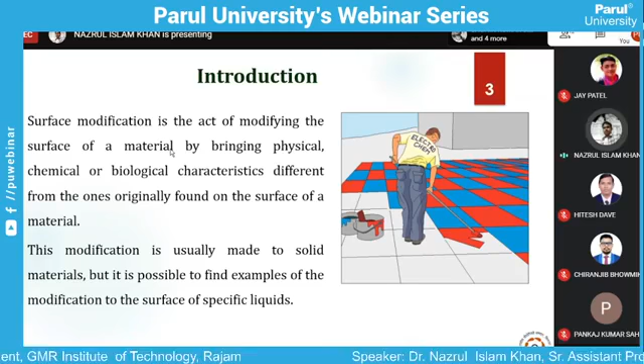This surface modification can be done not only for solid materials but also for liquid materials. If you take the example of the lotus, you can see that nature is also taking advantage of surface modification. In what sense? Let us see. The wings of a butterfly or the leaves, they don't get wet due to rain or water. So why does nature prevent them from getting wetted? Right.

Because if you see the surface image of a butterfly or a lotus flower in high magnification, you will see lots of hills, or finger-like structures on their surface. Due to the presence of those surface textures, the surface energy between the water droplet and the surface becomes very high, so they do not easily get wetted.

Now, what is the advantage of that not getting wetted? In the case of a lotus leaf, whenever a dust particle is on the surface, it reduces photosynthesis. Whenever water comes in contact with the surface, due to the large surface area, the water droplet takes a complete bubble shape, and adhesion and cohesion mechanisms take place.

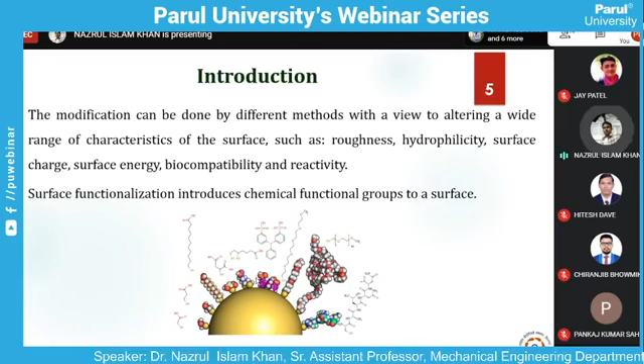Suppose we need charge, then we need to go for some free electrons or double bonds. So those things we can easily add on the surface of the nanoparticle.

In case of polymers also, there are limitations in the application of nanomaterials. In the field of nanotechnology, nanofillers have very high surface energy, and that's why these nanomaterials don't have good interaction with the matrix material—the polymer matrix has bad wettability, you can say.

So to increase the good wettability of the nanofiller with the matrix, or to incorporate certain electrical or thermal properties in the material, we can go for this kind of functionalization.

Surface functionalization is very interesting, please note this point: surface functionalization can tune properties at the nanoscale. If you want to get desired properties from the bulk material, the most important point is that if you can tune their properties at the nanoscale, that will scale up to very high levels when you get the bulk material.

That is why we generally play with the properties of the nanofiller at the nanoscale itself, and finally we harness the good mechanical properties out of the material. It also provides a means of further grafting. As I told you, A does not have the intention to make friendship with C, but if you have a common friend B, then maybe A is having some friendship with C. That's why it helps further grafting or conjugating other materials on the surface.

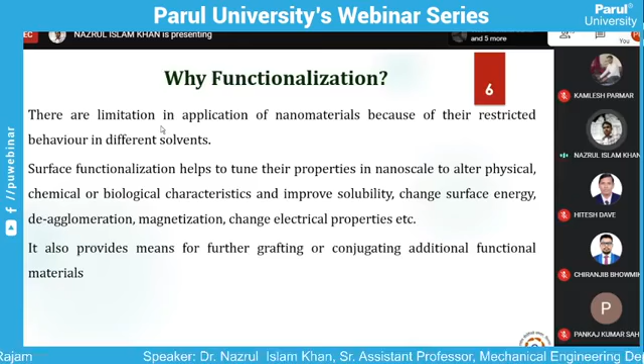So let us first discuss one of the surface functionalization techniques, that is silanization of carbon-based nanofillers. This topic has already been discussed by one of your previous speakers, but it is required to introduce my topic, that is smart self-healing materials. For that, I have taken this topic as well.

As you know, if you want to attach A with C, B is required as an intermediate. So suppose our intention is to attach an epoxy group on the surface of any carbon-based nanofiller. It may be carbon nanoparticle, graphene, graphite nanoparticle, fullerene, or whatever carbon-based nanoparticle. For that, we did oxidation so that we can introduce oxygenated functional groups like OH group, ketone group, or carboxylic group on the surface.

This carboxylic group, when we add it with a silane group, we used APTES, aminopropyl triethoxysilane, or GPTMS, glycidoxy propyl trimethoxysilane. These are surface functionalization groups having end groups SiO and NH2. In GPTMS, it has an epoxy group and SiO.

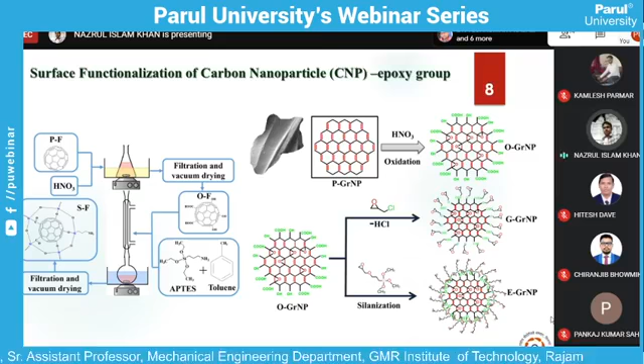The CH3 group and the oxygen hydroxyl group present will form a covalent bond and get removed as ethanol, and finally we get a structure having the end product as an epoxy group. This epoxy group, in my earlier example of A, B, C, but in my self-healing system I needed A plus B plus C plus D, because I could not attach A directly with D. So I took the help of two intermediate functional groups: first the oxygenated functional group, and next the epoxy functional group. What advantage these provide we will discuss later.

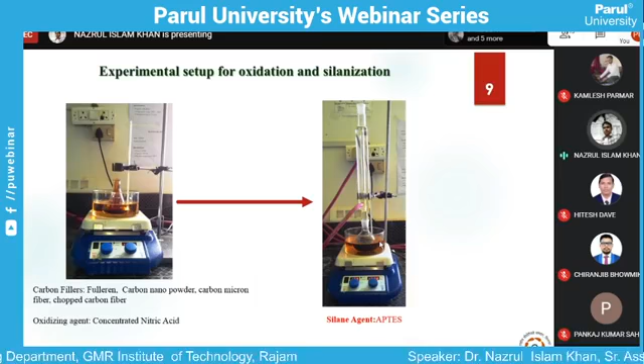Here you can see a very simple setup where we did this oxidation in a nitric acid solution, and then we used aminopropyl triethoxysilane or glycidoxy propyl trimethoxysilane. These are two methods having amine or epoxy group at the end, so this can be functionalized easily.

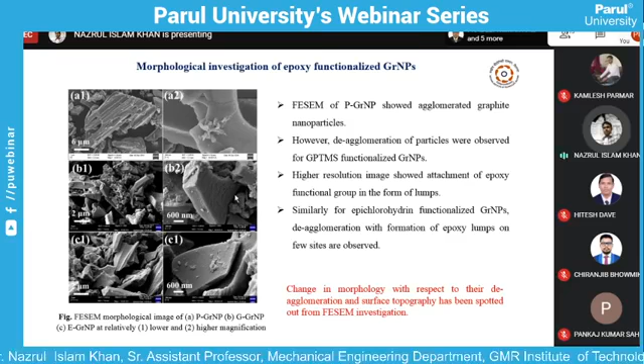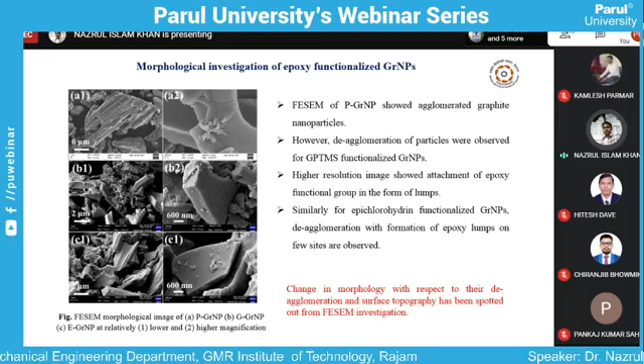After functionalization, we observed that surface properties can be significantly changed. If you see A1 and A2, we can see a lot of agglomerated graphite nanoparticles or carbon nanoparticles. But once we do the oxidation and silanization with them, they get de-agglomerated, which is very much required to harness better mechanical, thermal, or electrical properties. If the nanofiller itself is agglomerated in the matrix, we cannot harness those properties. So one advantage is that exfoliation or de-agglomeration takes place.

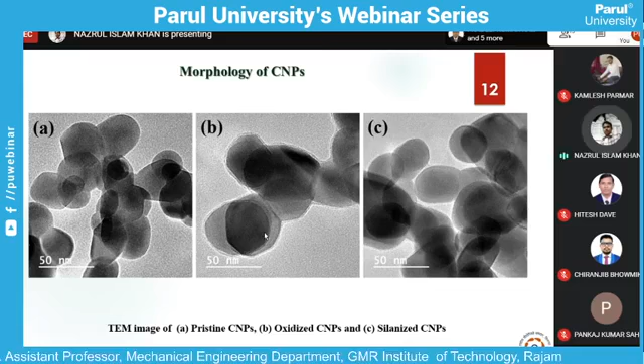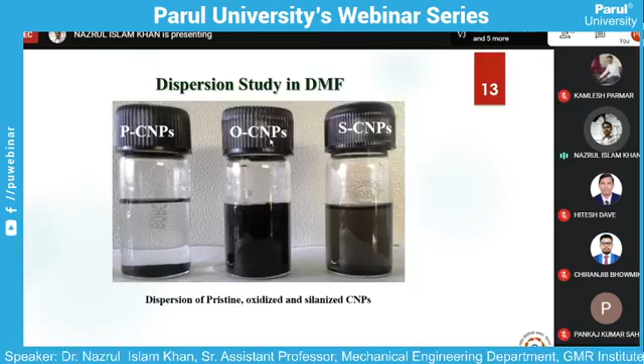This also gives the indication that successful functionalization has taken place. Another very simple technique: first find out the polarity nature of the filler, and accordingly select a solvent to disperse them. If the polarity matches the solvent and functionalization has been successful, the filler will not settle. But if it has not been functionalized, it will get settled. This is called the dispersion test, and it can also indicate that successful functionalization has taken place.

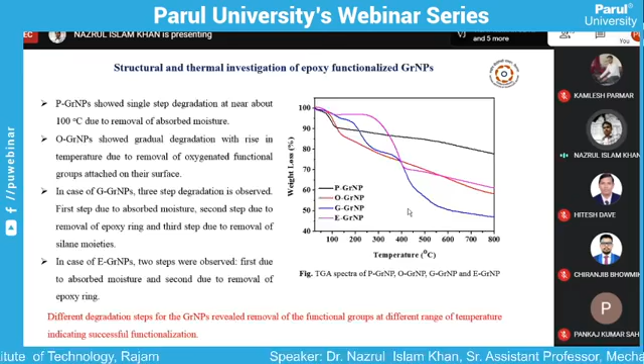This is a very simple tool. Due to the functionalization, before applying them for the next step, we first prepared some composite and tested their mechanical properties, and found that the GPTMS functionalization has the capability to increase tensile strength by 36% and 28%. So we got the indication not only from physical characterization that successful functionalization has taken place, but from mechanical characterization as well.

This is because the epoxy ring present on the surface of this nanofiller forms a covalent bond with the amine group, which is generally present in any polymer matrix. This amine and epoxy will interact and take more load between the filler and matrix. With good covalent bonding, whenever you apply load, it gets transferred from matrix to filler, and the composite absorbs more energy before fracture takes place. It diverts the crack in random directions, giving more energy absorption, and so the tensile properties or other mechanical properties improve with this surface functionalization.

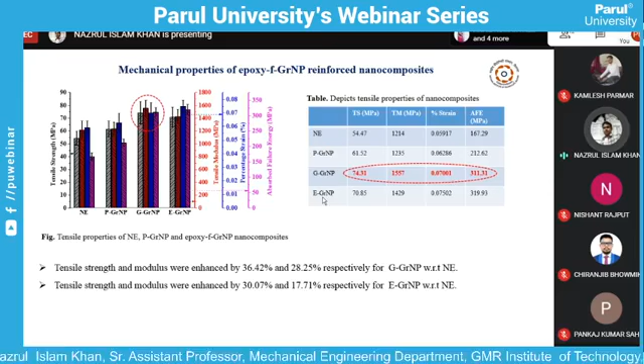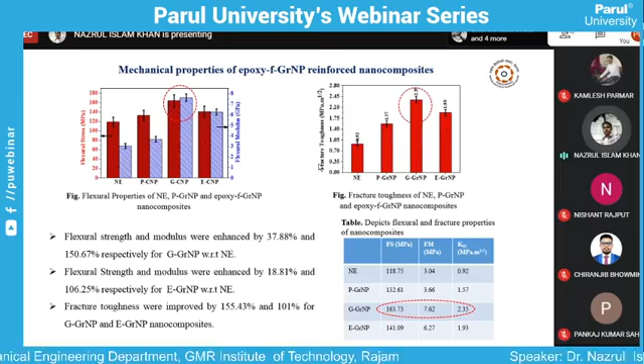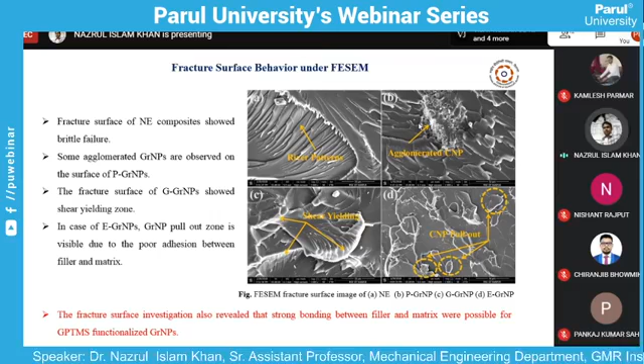When you can do this kind of surface functionalization, you will not see those kinds of agglomerates, and it will be uniformly dispersed. So this is again a very big advantage of this surface functionalization.

Next, coming back to other technology, what can be helpful for this kind of surface functionalization? Now, as I told you, I am discussing the self-healing CFRP composite. CFRP stands for carbon fiber reinforced polymer composite. So if you want to improve any properties of carbon fiber reinforced polymer composite, either you have to change the matrix material or you have to change the fiber property itself to get better interfacial adhesion between the matrix and the fiber. Whatever techniques I discussed before this slide were matrix modification, because if you add filler in the matrix, it will be stronger or stiffer, and it will take more load, and that load will be transferred to the fiber, and finally we will get better properties from the CFRP composite.

Now another technique is that you can deposit those nanofillers on the surface of this carbon fiber reinforced polymer composite. Recently we got some proposals from foreign universities. They are looking for a postdoc fellow for very fast development of glass fiber reinforced polymer composite, where the surface of the glass fiber can be modified using certain nanofillers.

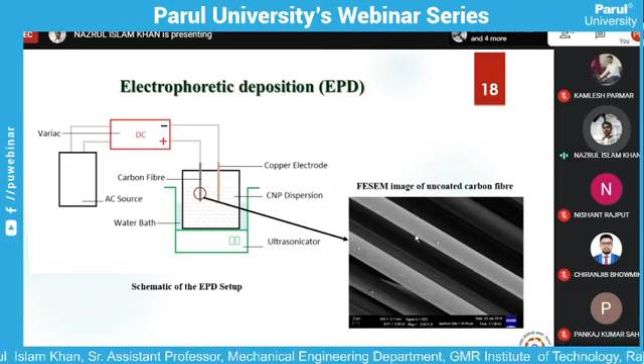One of the techniques is electrophoretic deposition. So what is electrophoretic deposition? If you disperse charged filler in the matrix, and you add the fiber, that is carbon fiber, at one electrode, and at another electrode you use some copper electrode or other conductive electrode, what will happen? These charged ions of the nanofiller will be attracted towards the surface of the carbon fiber, and the surface of the carbon fiber will be functionalized using this kind of nanofiller.

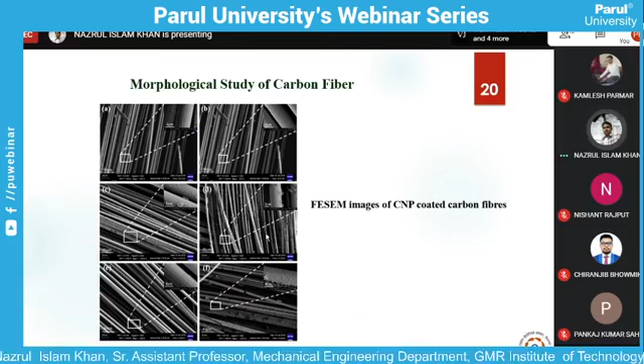So if you change the surface properties of carbon fiber, then you can also change the mechanical properties of CFRP composite. From this surface characterization of carbon fiber we can see this. In the last picture you can see the roughness, and in the first picture you can see a significant change in surface morphology, mainly due to the attachment of those carbon-based nanoparticles on the surface of the carbon fiber.

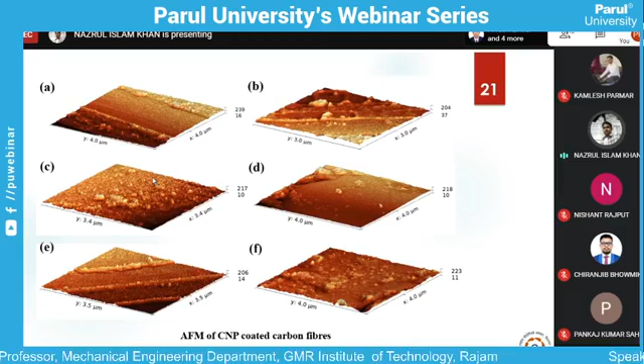Here also, if you do atomic force microscopy, you can see how the surface roughness has increased. Here I have not given any data, so I will skip this.

At what extent you need this deposition of the nanofiller will depend on what the applied voltage is. If you increase the voltage, you will get better deposition. But again, there is a limit. If you cross that limit, there is a chance that the fiber will get burnt, because you cannot add very high voltage.

To optimize that, you can play with the voltage and correspondingly prepare the composites. To see what the bonding between fiber and matrix is, we prepared a transverse fiber bundle test, TFBT test, where the fiber was kept in transverse direction and the matrix was poured along a silicon rubber mold, flowing over the cavity. Once you test it, there is a transverse load on the surface of the fiber. If you have better adhesion, you will have good tensile properties; if you have poor adhesion, the tensile property will be reduced. So in transverse direction, using the TFBT test, we are able to calculate how the interfacial adhesion between fiber and matrix is taking the role.

We found that 50 voltage and 5% of carbon nanoparticle gave us the optimum result, that is 35 megapascal. You may say this is very poor mechanical properties, and yes, it is poor, but this testing was just to confirm at what voltage this higher interfacial adhesion takes place. Generally, if you want to measure the tensile strength, we do the testing along the longitudinal direction.

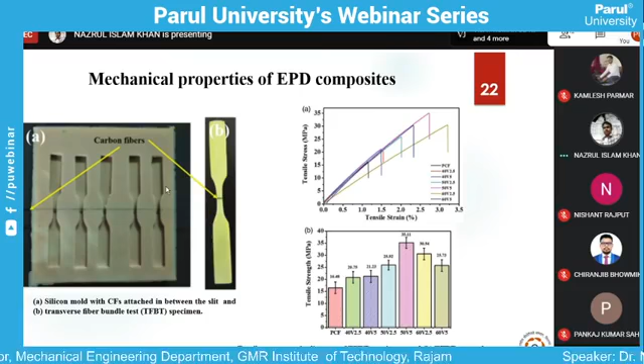So another technique that is very, very fast, because whatever technology you develop, that should be industrialized also.

So for that, electrospray deposition technique is one technique where you have a needle, like a syringe, in which you have the resin and the CNT dispersed. Using this adjustable or movable plate, once you apply pressure, the resin will come outside, and here is a roving of your glass fiber. So on the surface, once it comes out of this needle, between this needle and the glass fiber, there is a very high voltage.

If you apply high voltage, the spray of resin will become umbrella shaped. I mean the jet of resin will become umbrella shaped, or a very micro spray of resin will be there, so it will get easily deposited on the glass fiber.

This kind of design you can prepare in your lab also. This kind of setup you can easily do, because if you can easily change the x-axis and y-axis, and just keep unroving the glass fiber, we can completely make this system automated. Any system which is automated has high productivity and high demand in industry.

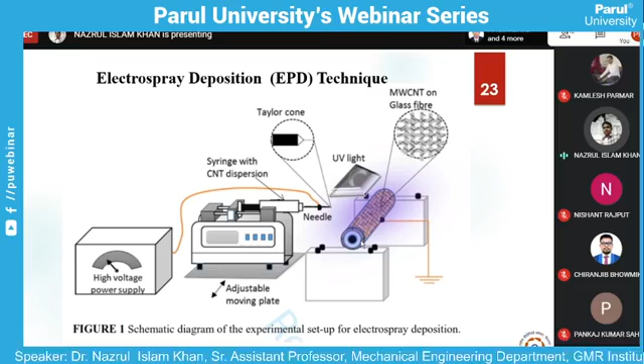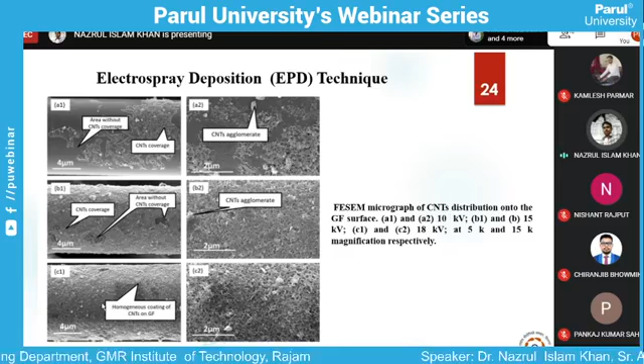So this electrospray deposition technique also you can see, this is a pure glass fiber, and this is a CNT, carbon nanotube deposited glass fiber, and you can see there is a huge change in surface roughness. If you can add surface roughness on glass fiber, there will be high mechanical interlocking with the matrix, and higher the mechanical interlocking with the matrix, higher you can expect the better mechanical properties or tensile strength of the composite.

Here you can see near about a voltage, voltage plays a major role, near about at 30 voltage. CNT here was taken near about, I have not mentioned here, it was something 5% only - yeah, I forgot to mention that. So at 5% and 30 voltage, it gave a very huge enhancement in the flexural strength.

So these three - one is electrophoretic deposition, another is electrospray deposition, another is nano modification of the epoxy - these three parts I have discussed. This has huge potential for industrial application.

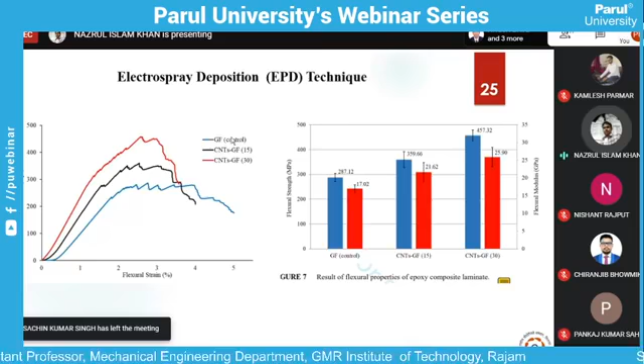Now coming back to the example of graphene, although we have taken the graphite nanoparticle, those are small particles, but the exfoliation of graphite nanoparticle was very difficult. But nowadays you can see there is a huge application of graphene.

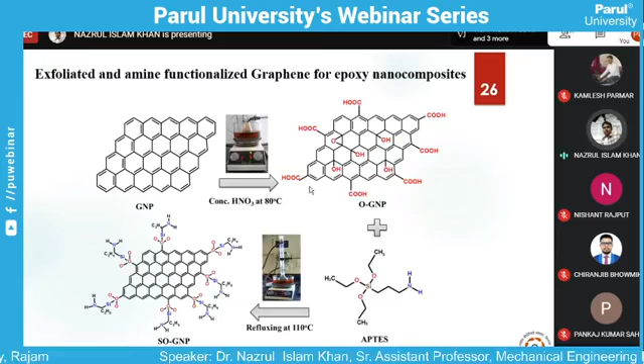So here we have taken some graphene nanoplatelets and we tried to modify their surface using different oxidation time and different oxidation temperature, and we optimized that. And here we found a very interesting point.

Some of the people who are working in graphene know that the synthesis of graphene is very tough. Single layer graphene - although within your battery you have some graphite rod that is also made of graphene, but you will not get any good properties from the graphite rod. You will get good mechanical, electrical, thermal properties of graphene only when you can exfoliate graphene up to a single layer or double layer.

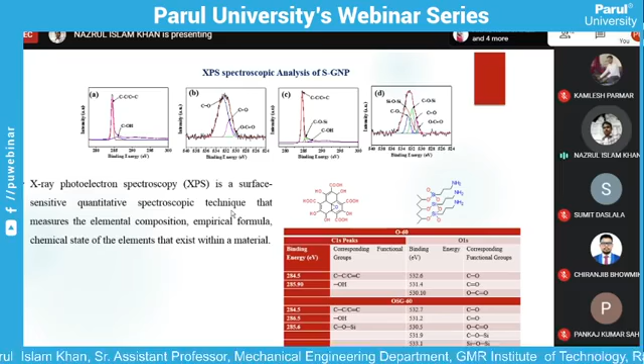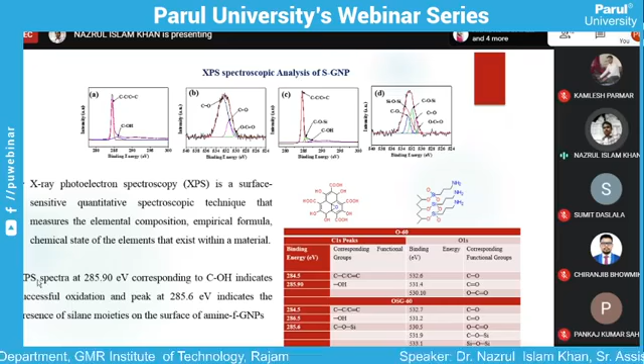So we did a lot of XPS analysis, X-ray photoelectron spectroscopic analysis. This is a sensitive quantitative spectroscopic technique that measures what elements are present on the surface. If you have any material, suppose A, and on its surface some unknown material X is there, if you do this XPS characterization, you can find out what unknown material is present on the surface. So this also we have done, and we found that the surface is successfully functionalized with amine or epoxy agent.

I'm not going in depth of this because then I will not be able to cover up within 1 hour. So again, we did atomic force microscopy. We measured the thickness of this graphene sheet, and we found that with increase in oxidation time - we varied the oxidation time as 12, 48, 60, 72 hours like that - we increased the oxidation time, and at 72 hours, we got near about 2 nanometer thickness of the graphene sheet.

But on the scanning range, you can see this kind of zigzag nature. Why? Because during exfoliation, we are also adding functional groups on the surface.

So any silane group, if you add on the surface, those will give this kind of nature.

But with increase in further oxidation time, there will be a lateral breaking of the graphene particles. So you cannot give a very high time for oxidation, because if you do, lateral breaking will take place, and that material will have high surface energy, and they will again form agglomeration. So our optimum result was 60 hours, followed by silanization.

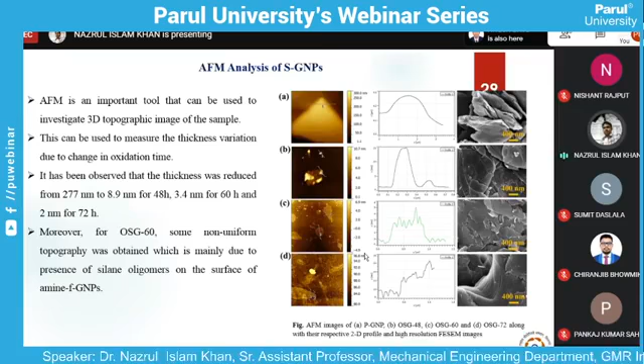We also found how to quantify the interfacial adhesion between the carbon fiber and the matrix material. For that we did nano indentation in IIT Kanpur, along the transverse direction of the carbon fiber and matrix, where we did the indentation on the matrix, approached the carbon fiber, and then passed through the carbon fiber.

We also calculated the nanomechanical properties. Nano indentation is nothing but hardness at the nano level, you can say nano hardness. Once it was on the carbon fiber, the nanomechanical property was high, but when it comes to the matrix material, the nanomechanical properties were low.

But there is a sudden change in mechanical properties, and the zone where this sudden change takes place is nothing but the interfacial zone of your fiber and matrix, the interfacial zone of carbon fiber and matrix.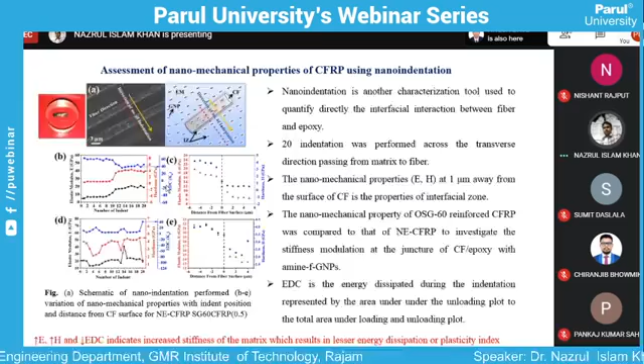Along this interfacial zone, if you see the neat epoxy, without any modification, without any surface functionalization of graphene, the interfacial properties are low as compared to the modified case, as I have shown here.

This is without any graphene, and this is with graphene. The middle images show the interfacial properties, where the interfacial properties of neat epoxy were lesser, but in case of silanized graphene, the nanomechanical properties have been enhanced significantly.

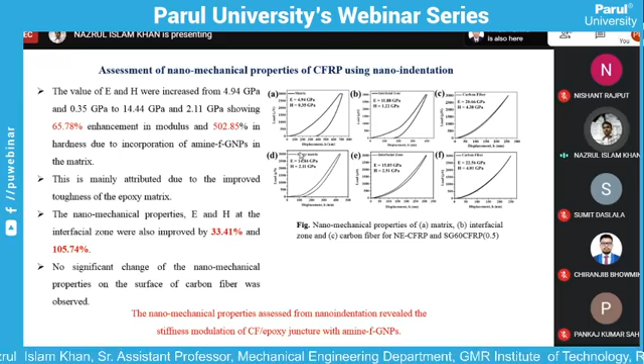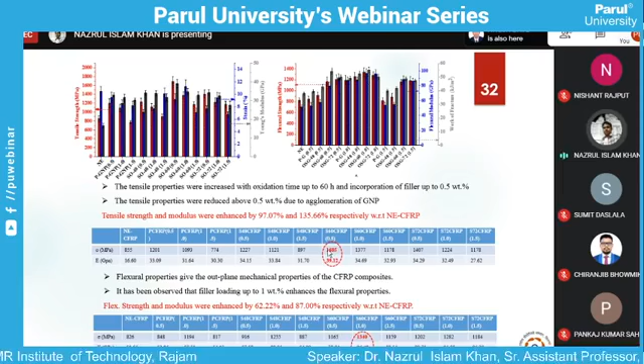Then we measured the tensile test, and we found that 60 hours gave the best result, obviously, because 60 hours had the highest exfoliation, and only 0.5% of graphene was sufficient to improve the mechanical properties in terms of tensile strength. You can see the tensile strength of NE-CFRP is only 855 megapascal, but in case of this silanized graphene reinforced CFRP, it is 1685 megapascal.

So this is almost 4 times that of steel, but with very lightweight. This technology was very helpful to improve the mechanical properties, in-plane or out-of-plane.

Now coming back to the biocomposite, as you know, any material where the matrix and fibers are biodegradable, the composite prepared out of those components, we call it biocomposite. I will not go in depth since you already know the fibers may be bamboo, flax, kenaf, hemp, sisal, jute, coir. These are some different types of biocomposite, and these are some of their properties.

Out of these different biocomposites, I have chosen bamboo because I have worked on this topic, bamboo composite. The bamboo composite is organic and biodegradable, has high tensile strength, and can be harvested annually because we have a lot of source in the northeast part of India. We have a lot of bamboo forest, and we can easily harvest them.

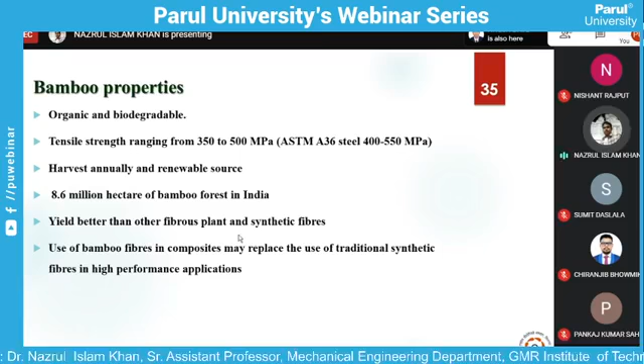There is 8.6 million hectares of bamboo forest in India, so the yield is better and you can easily extract the bamboo fiber. This is the process through which we prepared the fibers from the bamboo: first we took the bamboo, then prepared chips of bamboo, then extracted the cellulose.

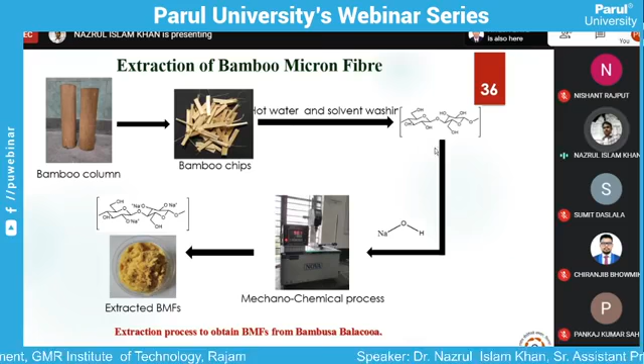Actually, bamboo itself is a composite, having cellulose as the fiber and lignin as the matrix. Once we do the alkali treatment, the matrix material gets removed and only the fiber can be extracted.

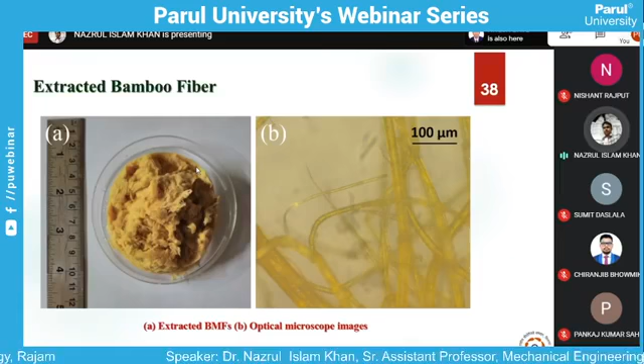But this extracted fiber has a high agglomeration tendency. For that, we again have to do some surface functionalization like benzoylization or silanization. Those will also help to get a de-agglomerated bamboo fiber. I will skip a few of them.

You can see in this figure, the middle portion, before the functionalization and after functionalization, the surface property of the bamboo has been significantly changed. If the surface is coated with this APTES or benzyl group, then it will not agglomerate with the nearby bamboo.

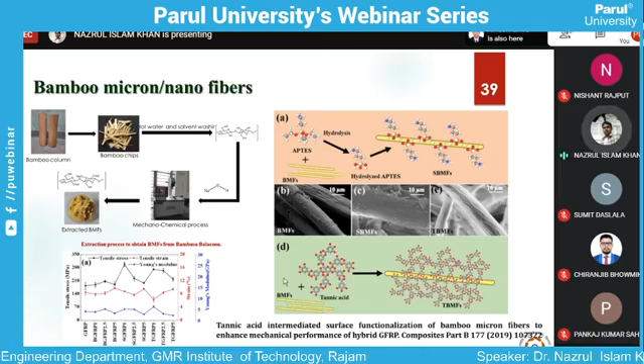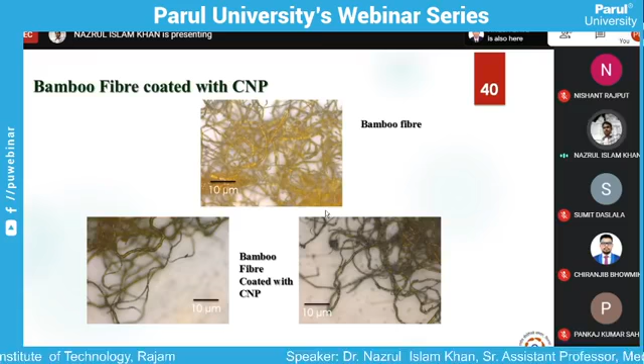Next, we can take the help of ball milling to convert the bamboo microfiber to bamboo nanofiber or bamboo particles, because these long fibers can be broken to get the powder form of bamboo micro. These powders can be used for preparation of the composite, giving better mechanical properties.

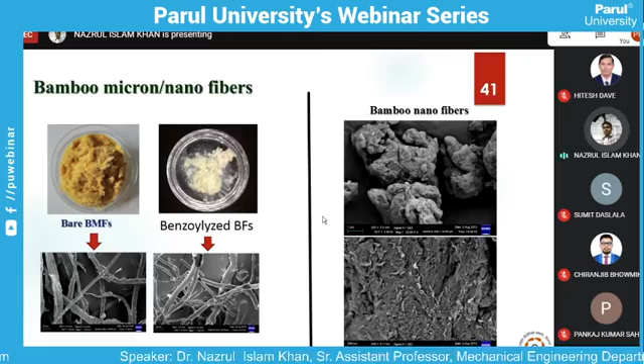These are some research areas, because our intention is to show the research scopes available in this surface functionalization. You can take any source material and prepare a composite with a certain goal. We Indians have a bad habit of first doing the research and then searching for what the application may be. We should change that nature and first decide what the application will be, then accordingly choose the raw material and select the functionalization method.

Next, coming back to the very important topic, that is smart self-healing composite. For preparing this composite, we need to know the surface functionalization techniques, and that's why I have shown all these slides. Now coming back to self-healing, what is it actually?

Self-healing means, whenever our body gets cut or has any injury, it heals automatically, right? Same thing, whenever there is a crack in a material, it has the capability to heal the cracks.

This is a bio-inspired mechanism derived from nature, and the first invented technique for this kind of mechanism was by the Illinois University Sottos group. They invented this technology using a microcapsule based approach. I will discuss them, as shown in this figure.

In case of FRP or CFRP composite, our motivation is this: in composites, failure doesn't happen suddenly. First, during preparation, some micro voids or cracks get generated at the nano or micron level. Then those micro or nano cracks propagate to a large scale, and finally there is catastrophic failure.

Our motivation was that if you can arrest the micro cracks at their nano or micron level, then maybe you can enhance the lifetime of the material.

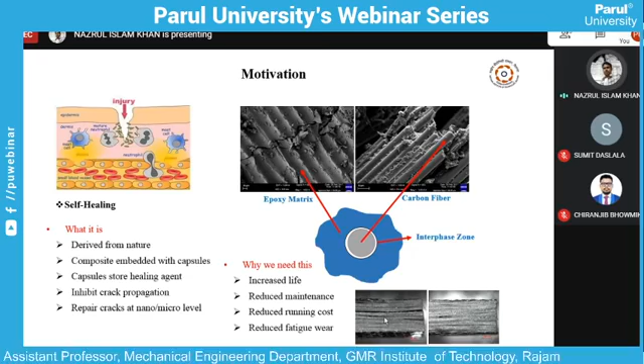If you take advantage of self-healing, just keep the cracked part in an oven and it will get healed by itself, like keeping it under sunlight to get rebonded. These cracks will vanish automatically. How this happens is what we are going to discuss later.

The first technology invented was the microcapsule based technique, where resin and hardener were kept separate—one capsule containing resin and another microcapsule containing hardener. Whenever cracks propagate through this capsule, the crack breaks the microcapsule, so along the crack path the resin and hardener come together, and finally the crack gets healed. This is the technology the Sottos group developed, but it only allows single-time healing.

Once it has healed once, if the crack propagates through the same surface again, it will not get healed in the next cycle. But in my PhD thesis, we developed for the first time multi-times self-healing capability without any external intervention. How the capsule has been synthesized is again another topic.

I am not going in depth, but I will just call the technique the solvent evaporation technique. I will give a brief introduction on how we prepared the microcapsule.

So this is oil, this is water. Those form two layers and will not get mixed. Once you do the stirring, water-oil droplets will form in the water, but when you give sufficient time, those will separate again, right?

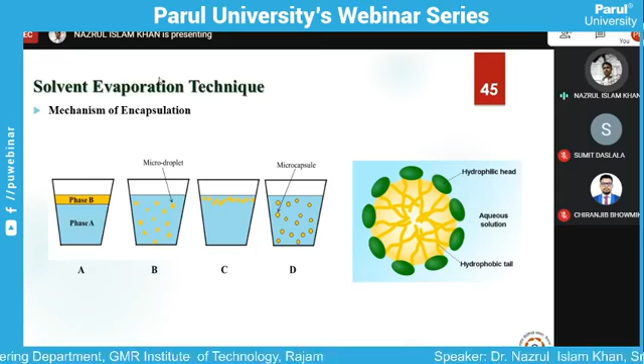The microcapsule technique has a lot of applications, including drug delivery. I have also used this microcapsule for self-healing of adhesive joints. In the resin system, I added hardener-containing and epoxy-containing microcapsules, mixed them, and incorporated them onto the surface of the substrate.

Once it was joined and I tested the sample, it broke. Then I kept the sample under some predefined pressure, and it got rebonded again. That is the beauty of self-healing.

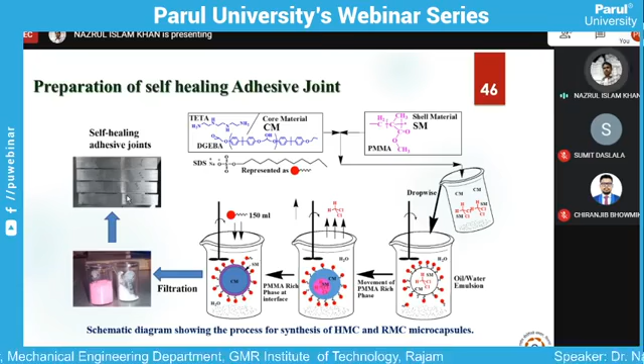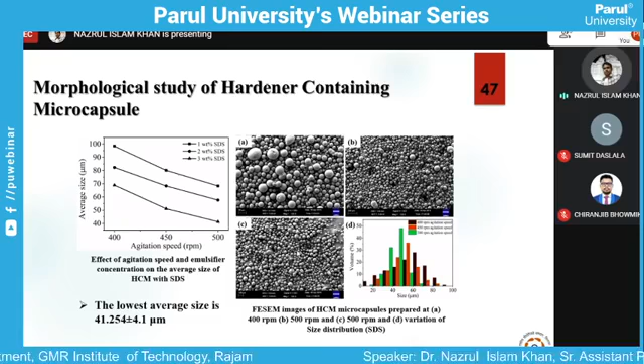But this is a single-time healing only. Once it got rebonded, a second time you cannot get healing from this mechanism. That is the disadvantage. The stirring speed can be changed to get a reduced or different size of the microcapsule.

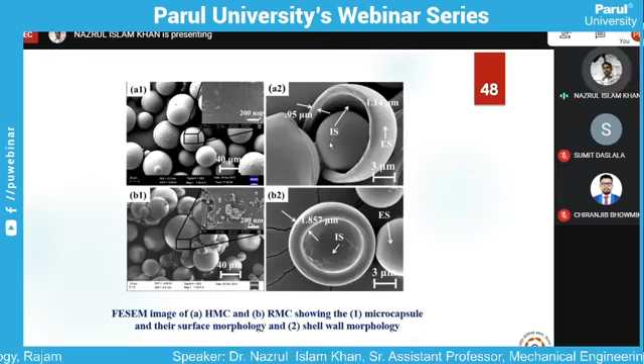This microcapsule is a spherical ball. Inside it, your core content will be there, either resin or hardener. Okay, I will go a little bit faster.

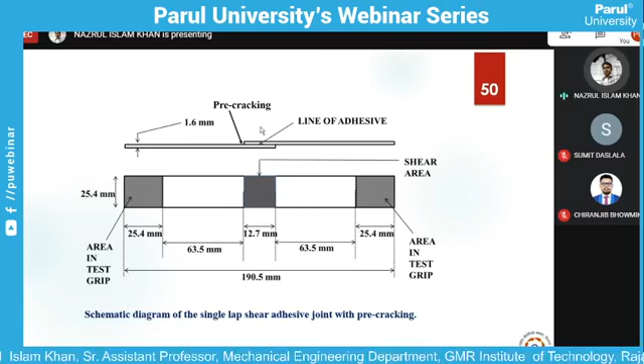This is the adhesive joint where, along this line, we applied the smart adhesive on the surface. Once we applied load, it broke, and once we took the two substrates, placed them in the same position, and gave a small pressure, it was able to rebond, and we got the same mechanical properties again.

We got a healing efficiency of near about 90%. What was the microcapsule content? At 10 weight percentage of resin and hardener, we got 90% healing out of the material.

So how did we calculate healing? First we tested the material until broken, and we recorded the interlaminar shear strength, ILSS. That is called ILSS in case of lap joints, interlaminar shear strength.

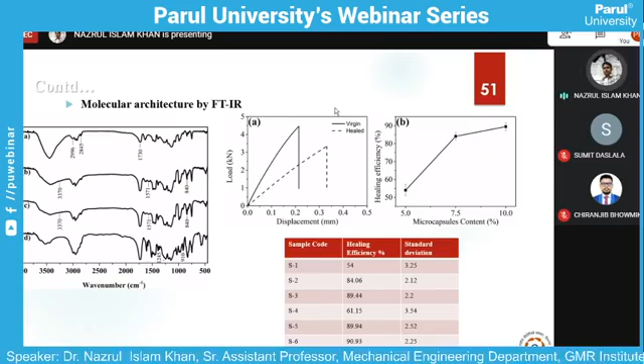Next, once we healed it and tested again, we compared the ILSS after healing with the ILSS before healing. The ratio is nothing but the fraction to what extent it was able to recover the ILSS. If you multiply by 100, that is the healing efficiency.

Our team was able to win the ZED Project Challenge in 2014. They got the first prize out of India for this project.

You can see I prepared not only adhesive, but some composites also. When it gets broken, once you join these two samples and give some heat, it will rejoin, and you cannot even see where the piece was broken. That is the beauty of this technology.

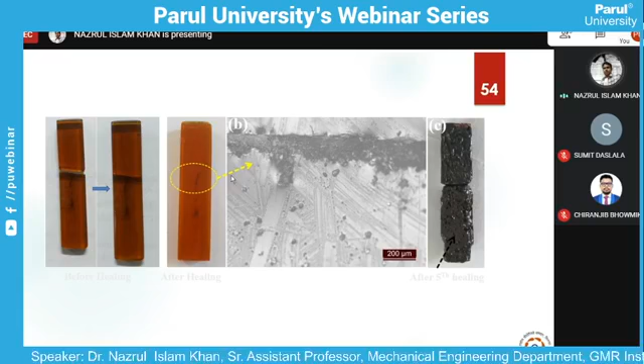But the disadvantage is that only single-time healing can be done, and after healing there is some degradation of the material like this. So we left this technique and developed a new technique.

We also tested scratches on the surface and saw that self-healing was possible, because this is the scratch before healing and this is the scratch after healing. The size of the scratch has been tremendously reduced, because with time it is healing the surface.

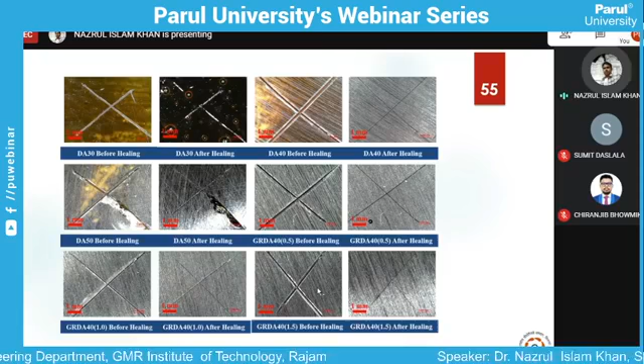From the scratch test also we were able to get the healing visually, but we were not able to quantify it. We could just visually compare the results.

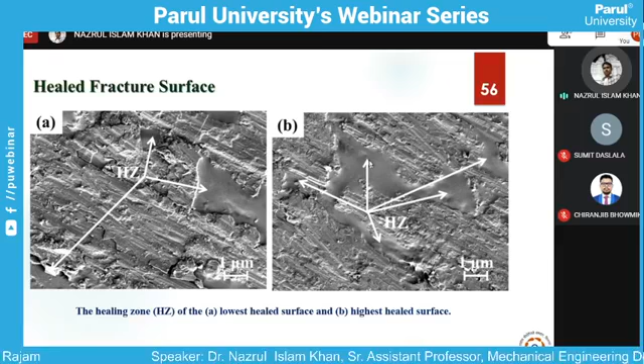On the high resolution microscope, FESEM, we have seen that due to breaking of the microcapsule, some resin and hardener has flowed onto the surface. These are some resin and hardener wetted zones you can see, and these regions are the reason behind the self-healing that takes place.

Whatever technology I have shown so far was single-mechanism technology. Now we have used Diels-Alder based chemistry. What is Diels-Alder chemistry? There is a diene and a dienophile part, and whenever they form a bond, they form a Diels-Alder adduct.

If you apply mechanical stress and break that bond, just keep them nearby and apply heat, they will reform the bond itself without any external intervention, without any pressure requirement. This bismaleimide Diels-Alder adduct, if added on the surface of nanofiller, can give multiple-times healing capability from the polymer composite, or even applied for CFRP composite, because our final intention was to test them in CFRP composite.

So first we started from polymer, then we applied it in CFRP composite. For that we have prepared a hybrid resin system: one is thermo reversible resin, another is thermo irreversible resin.

Reversible and irreversible, you should understand. Reversible means it will break bond when you apply heat, and reform bond when you pull down the heat. That is thermo reversibility. Thermo irreversible will not do this when you apply heat and pull down.

So this bismaleimide, thermo reversible and thermo irreversible, if you add them on the surface of graphene, and the thermo irreversible in the matrix system, those will have a bonding. This bonding, shown here on screen, is the Diels-Alder adduct.

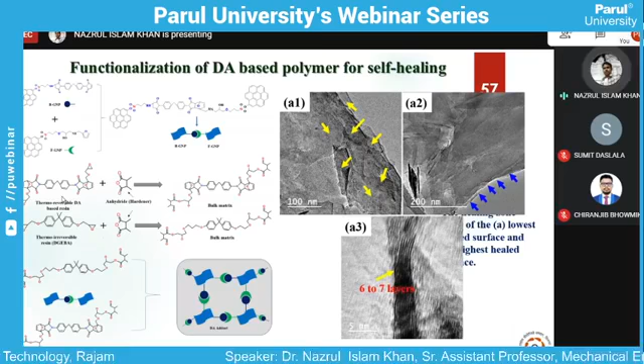Again, I have to go to the previous slide. There are two parts: one is diene and another is dienophile. Furfuryl amine is your diene and bismaleimide is the dienophile.

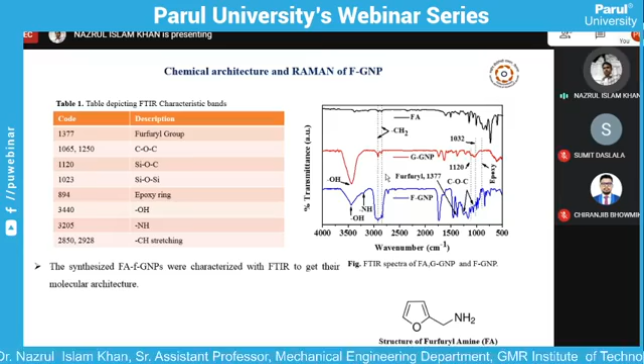So we need to functionalize graphene with both the diene as well as the dienophile part. First we functionalized with furfuryl amine and checked the chemical characterization and found that functionalization has taken place. We also did XPS analysis and found that surface functionalization has taken place.

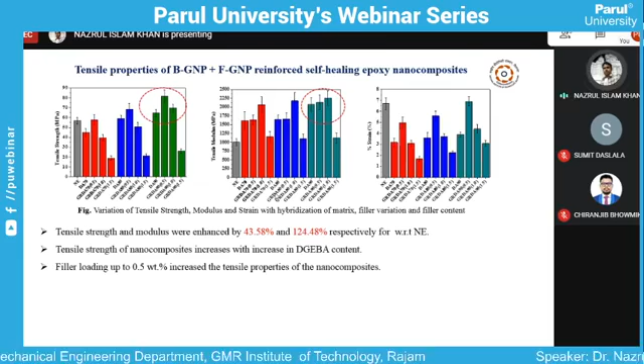Then we checked how the mechanical properties have enhanced in this kind of nanocomposite. If you prepare the nanocomposite of this furfuryl amine functionalized and bismaleimide functionalized graphene based polymer, then how will it behave.

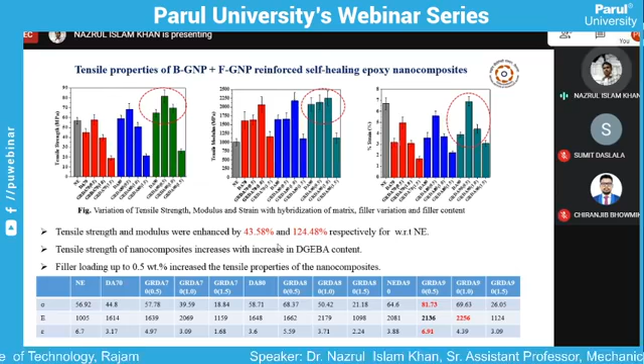We have seen that yes, it was able to improve the tensile strength also. The tensile strength was improved by 43.58% and modulus was improved by more than 100% - a two-fold increase was observed.

Till now, the literature found that if you add any self-healing property in any material, the mechanical properties reduce. But we were, for the first time, able to add self-healing as well as improved mechanical properties, and that's why we were able to file a patent on this work.

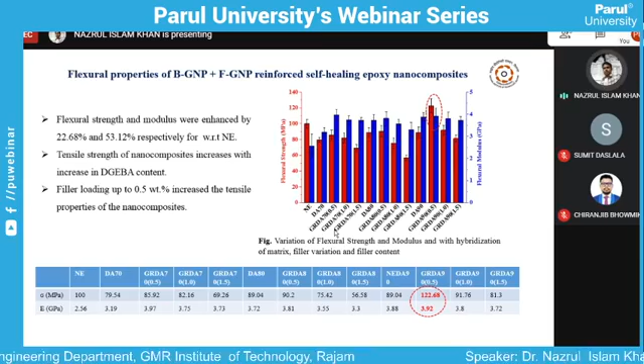Next, we also tested the self-healing properties and flexural strength, where we got some enhancement. I'm not going in depth, because this enhancement was there since the bismaleimide and furfuryl amine functionalized graphene were able to form covalent bonding with the matrix. Due to that, we were able to get this kind of enhancement.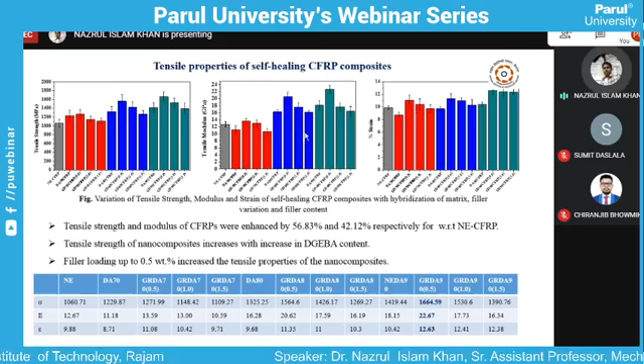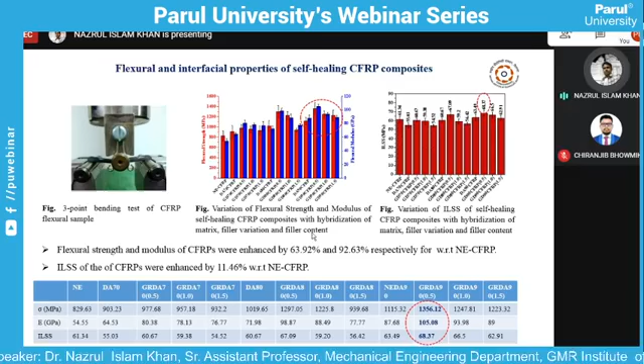We also prepared a carbon fiber. First we tested in nanocomposite, then we prepared the CFRP composite and found the same enhancement. Then we tested the out-of-plane mechanical properties and found a huge enhancement in flexural properties, like 63% enhancement in out-of-plane mechanical properties.

Then we tested the double cantilever beam - this is the father of this technology - which we tested as per ASTM D5528. Using this double cantilever beam, with a predefined crack path using a Teflon sheet, we first incorporated delamination intentionally with an intentional crack path.

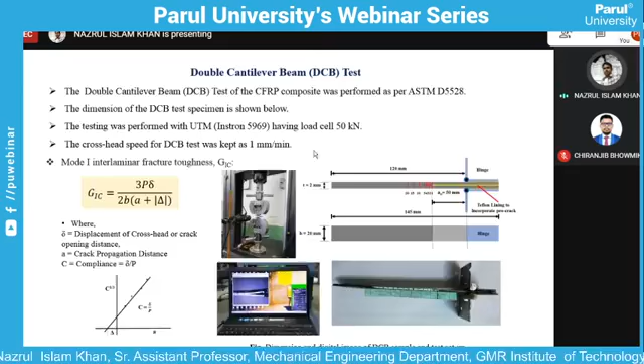We recorded the crack path propagation using a high-speed camera, and noted the peak load that could be sustained for this crack propagation. After that, we healed the sample and tested again. So after healing, what is the interlaminar shear strength, and before healing, what is the interlaminar shear strength? Comparing them, we were able to calculate the self-healing efficiency.

This is mode 1 fracture toughness, the strength you get from the DCB test, double cantilever beam. That is called mode 1 fracture toughness. I cannot go in depth of this - you can easily get this from the ASTM standard.

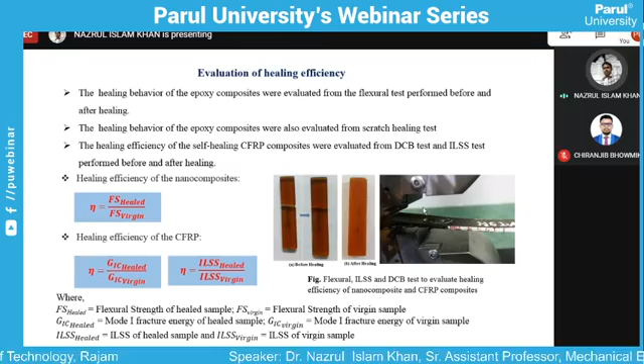What is G1C, G2C? It is mode 1, mode 2. There are three modes of failure: mode 1, mode 2, and mode 3. This was mode 1 fracture toughness, and we got the healing efficiency of 87%.

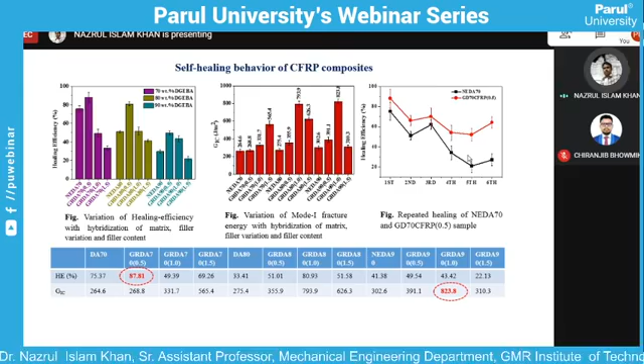And what was most important is that we were able to get repeated times of healing. But with number of cycles, the healing efficiency got reduced. That is still one disadvantage. But still up to 6 times we were able to get the healing efficiency.

You can see this is the cracks before healing, and this is the cracks that appear after healing. The cracks have vanished once you apply heat and add the technology of self-healing. Those cracks got vanished, right?

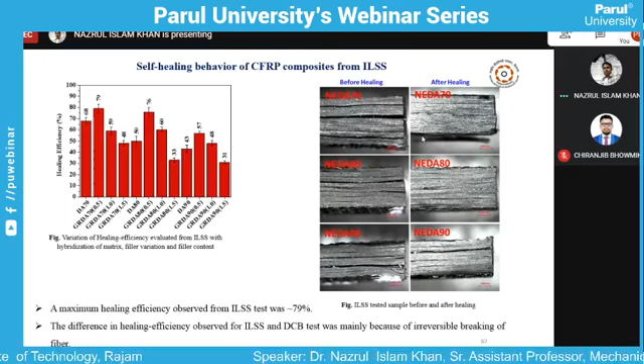But it depends on what is the hybridization percentage. As I told you, I prepared a hybrid matrix - thermo-reversible and thermo-irreversible - depending on the amount of thermo-reversible matrix present in the system. Depending on that, you can have different extents of healing. But if you give a very high amount of thermo-reversible matrix in the system, what will happen?

Mechanical properties will get reduced. So we have to take both things into account - we have to improve the healing efficiency as well as improve the mechanical properties. But in general, mechanical and healing properties have a trade-off nature. If one increases, another decreases. So a proper balance is required.

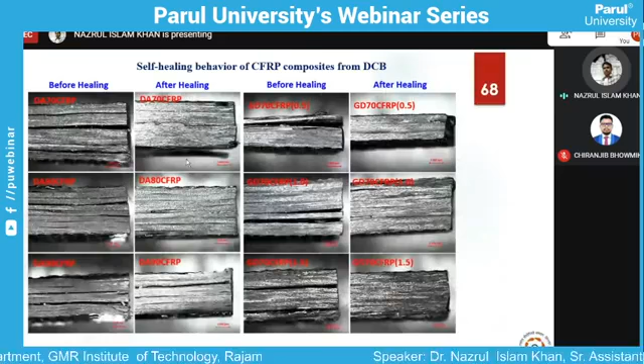So for that we need a lot of parameter variation and optimization to get a better result. And for our case, we got 70% DGEBA resin and 0.5% filler that can heal up to 87% healing efficiency. I will stop here because if I go for substrate functionalization for adhesive joining, I will not be able to cover this thing.

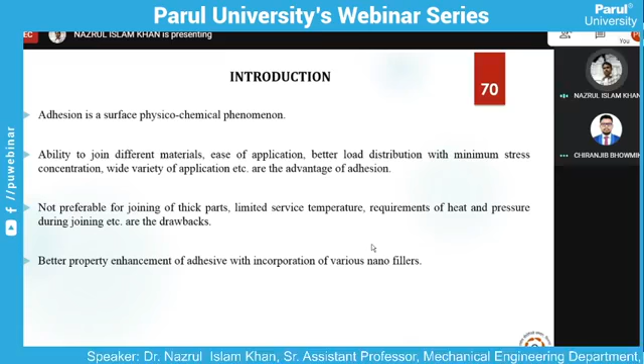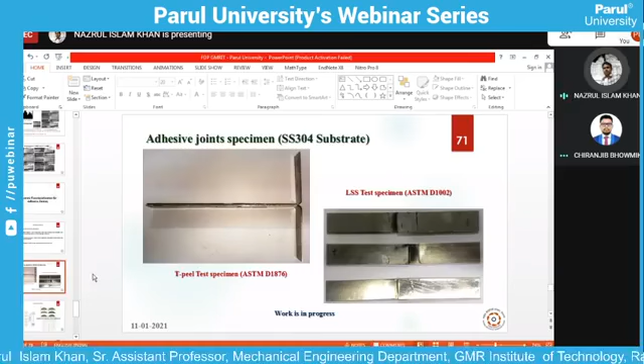So this is a different application of surface functionalization. I will skip the adhesive joining part and how surface functionalization helps in adhesive joining. This small 2-3 slides were there, but the conclusion I have got is that functionalization of nanofillers through a single step process has a great future.

What was our problem is that whatever processes we developed, these were multi-step functionalization processes. And any process which is multi-step and chemical route based is not welcome in the industry. So you have to develop a technology of surface functionalization like cooking in a pressure cooker - everything you give in the pressure cooker and finally you get the food ready. That kind of technology, if you can develop, maybe it will be a great contribution to the scientific society.

Next is conversion of lab scale to industrial scale for green methods. We should not use any acid, bases, or other carcinogenic chemicals - we have to take care of this. If you develop any technology without using those carcinogenic chemicals, maybe it will have great application.

And I would like to inform you that for graphene, till now a lot of research scope is there. You can go for graphene, you can go for functionalization of graphene, and you can go for different applications.

In case of smart self-healing applications, till now whatever healing was required, I needed some temperature to get heat. But if you can develop something at completely room temperature - like Motorola and some other companies have already developed technology where if there is a scratch on the surface of your mobile screen, it will be automatically healed - those types of healing are very much required. Although they have demonstrated this for those kinds of applications, structural application and healing at room temperature, till now, no one has been able to develop.

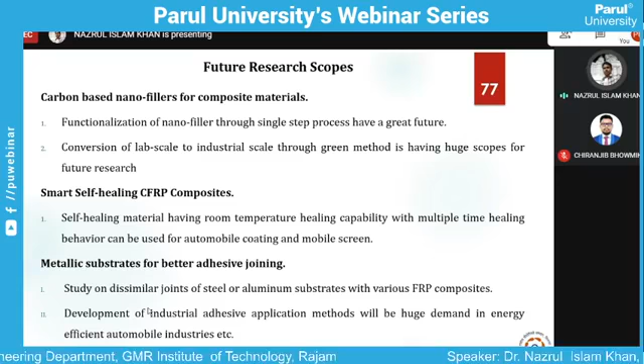Next, you should be able to get healing as well as better mechanical properties. This metallic substrate part I have skipped due to time limitation. So I would like to open this session for the audience - if you have some doubt, you can ask here.